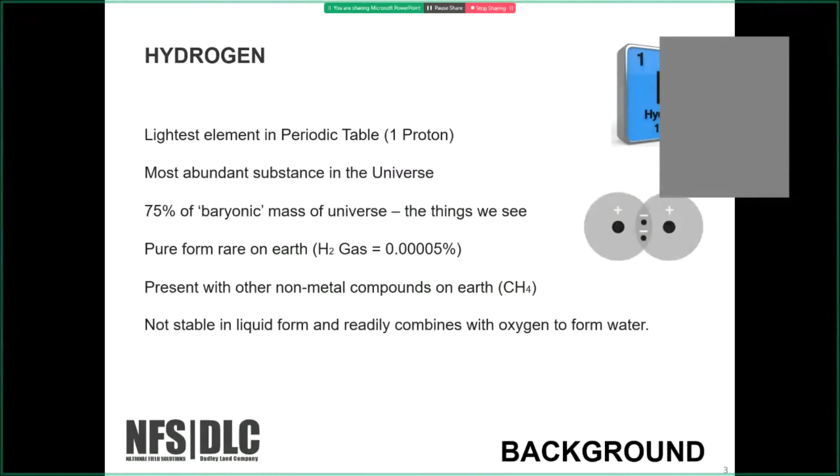All right, so some history of it. A lot of the development of hydrogen we know about is in Europe. I don't know if other parts of the world had much going on, but in Europe, 1520 was the first time there was a record of hydrogen, from Paracelsus - am I pronouncing that right? - a Swiss physician, alchemist. And then it goes on with more advancements in the study of hydrogen, mostly all in Europe there.

Hydrogen was given its name in 1783. Hydro equals water, genes born of water.

Electrolysis of water into hydrogen in 1789 by a Dutch physician, and then the concept of a fuel cell in 1801. One big advancement with hydrogen was the ability to do a Haber-Bosch process, creating fertilizer from hydrogen and nitrogen in the air, done a lot in the U.S. Hydrocracking was developed by a German scientist.

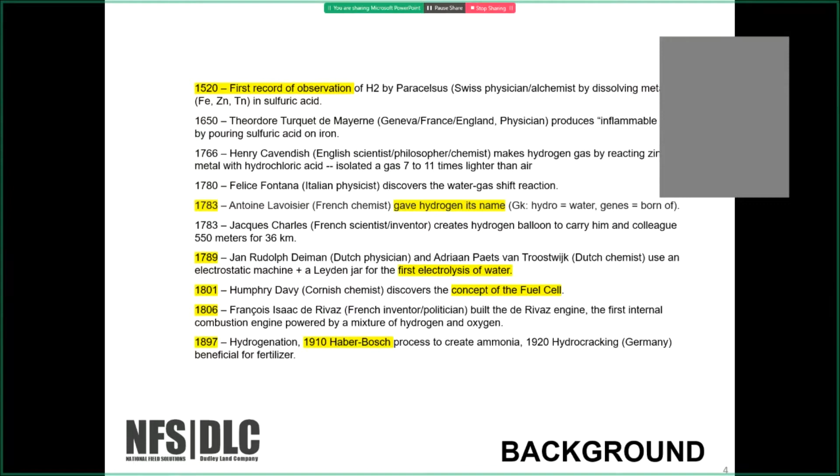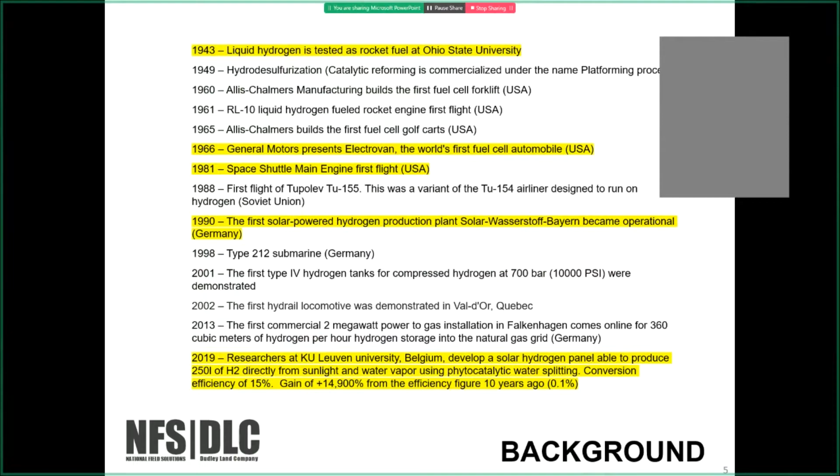Further along in the USA, land of innovation, Ohio State University tested liquid hydrogen as rocket fuel, which went on to be used in space propulsion for spaceships. General Motors got its own Electrovan, the first fuel cell vehicle, in 1966, and it goes on from there. They got into solar-powered hydrogen, a lot of that in Germany in 1990. So a lot of great advancements coming along, and hopefully we get more of those in the USA, and we are.

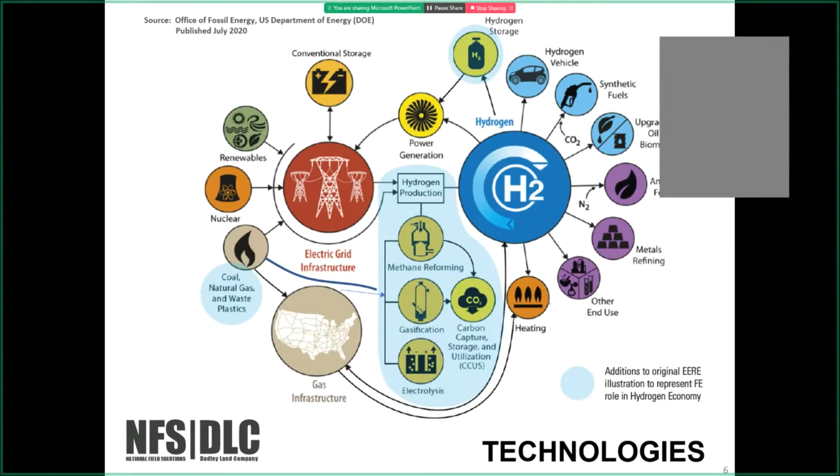There are different types of hydrogen, different colors. People categorize them to describe them, based on the source of hydrogen, the methods used to produce it, and the byproducts of producing it. So there's gray, blue, and green.

Gray describes hydrogen being created from fossil fuels with carbon dioxide byproduct released to the atmosphere. You can also create it from biofuels and release carbon dioxide to the atmosphere, so it's not just petrochemical.

Now blue is hydrogen created from a carbon source, petrochemical or could be biofuel. Most often, 99% of the time in the U.S., it's from petrochemicals right now through the steam reformation process, or SMR. When that CO2 is released, it's gray.

When the CO2 is captured for storage or reuse somewhere else - there's even talk about turning that CO2 into graphene, because graphene is a great material, and they're coming up with new ways of using it - well, then that would be considered blue. You're no longer releasing the CO2 to the atmosphere, you're storing it or reusing it.

And green is hydrogen with no CO2 byproduct. Green hydrogen is created from water using electrolysis generally, although there are other methods for splitting hydrogen away from water. The byproduct would be oxygen, no carbon dioxide produced.

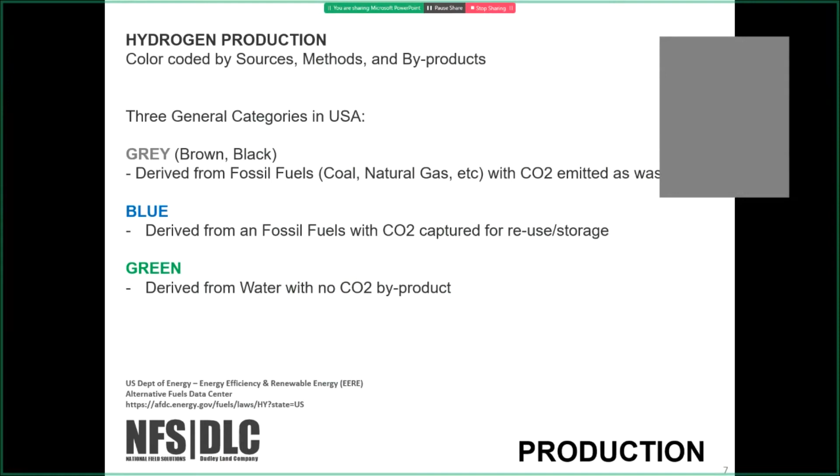Steam methane reforming uses heat plus petrochemicals to extract the hydrogen from the CH4 molecule. Electrolysis, that 1%, I already explained. There are also other ways of extracting hydrogen: photoelectrochemical, like from photovoltaic cells using catalysts, and photobiological, getting algae and bacteria to create hydrogen using sunlight under certain conditions - very much in the early stages of research.

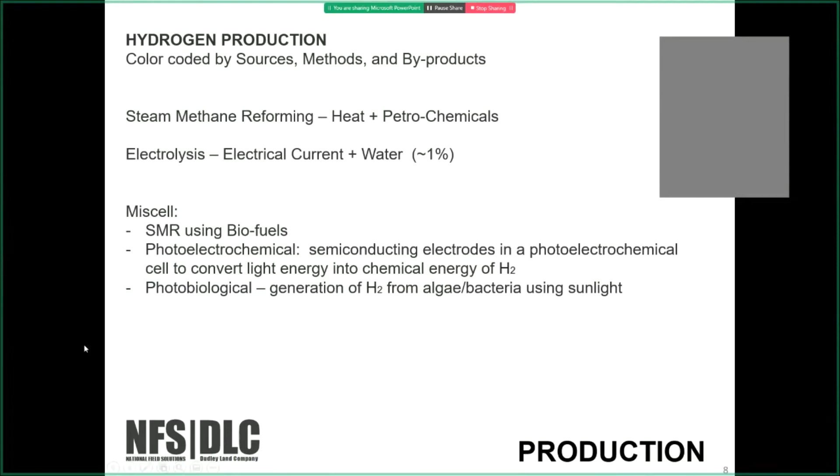Now, there's currently a lot of talk about integrating hydrogen into natural gas lines, and it's already started in some countries. It's set to go up running this fall with the Long Ridge Energy Plant in southeast Ohio, Hannibal, Ohio.

Hydrogen does cause a problem of metal embrittlement, steel embrittlement, but not much at low levels. So you wouldn't run 100% hydrogen through an existing steel pipeline - you'd want something like a plastic, a polymer pipeline. So even if we did go all hydrogen someday, we'd still need plastic feedstocks. Fossil fuels would definitely still be a necessary part of our economy.

When looking at transmitting it through the existing natural gas supply chain, you'd go up to 5% - they're going to start at Long Ridge doing 5% hydrogen and natural gas as a blend. You could go up to about 10%, and then you've got concerns about steel embrittlement. So we're looking at gathering lines, transmission lines, and distribution lines.

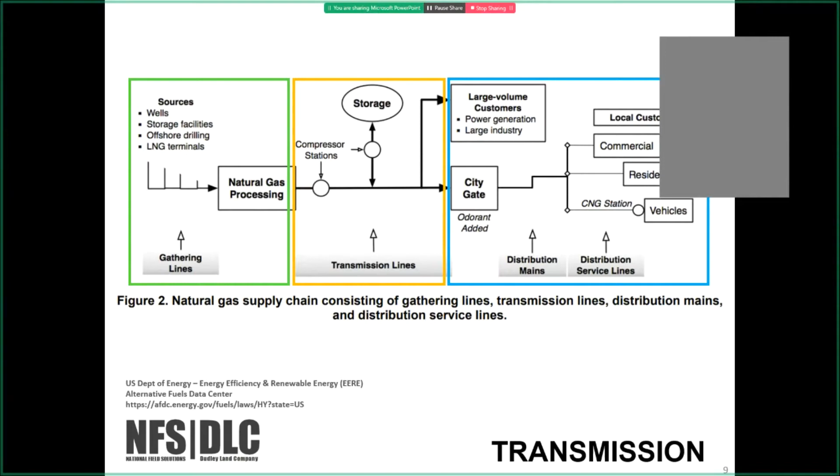Those are the three sets of pipeline networks that all come together to extract natural gas and run it through to an end user. And each of these has its concerns with hydrogen.

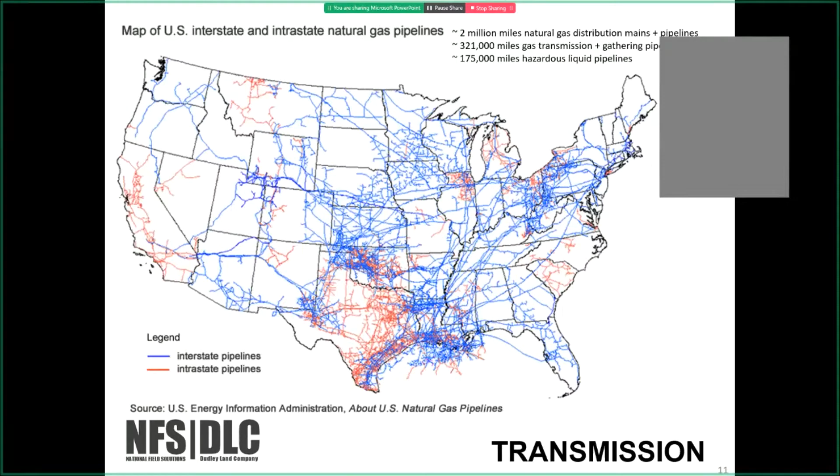Some concerns about using hydrogen in our existing infrastructure: one is steel embrittlement, another is the cost. If you want to go hydrogen, you'll probably have to maintain, upgrade, or change out your pipelines so they're more compatible with hydrogen. Hydrogen is a tiny little molecule, while CH4, your methane, is a larger molecule. Hydrogen's teeny, it can actually leak out through pipelines, not en masse, but just enough. You'll have some transmission loss, more so than with methane.

Even with plastic, you'll have a little transmission loss, just less than with steel. So the steel embrittlement is one problem, replacement and maintenance on pipelines is another, and then new safety regulations. When you're taking a chemical or compound that's more volatile and sending it really close to a populated area, there are some safety concerns.

Plus, if you're getting people in there to work in confined spaces along these pipelines, and you have a very teeny molecule of hydrogen leaking out through seals that have to be upgraded, maybe compressor stations, going into confined workspaces, that can displace oxygen. So a worker who'd enter in there could suffocate. And then you have to worry about creating a spark near an environment with hydrogen and oxygen - that could be bad. Transmission loss.

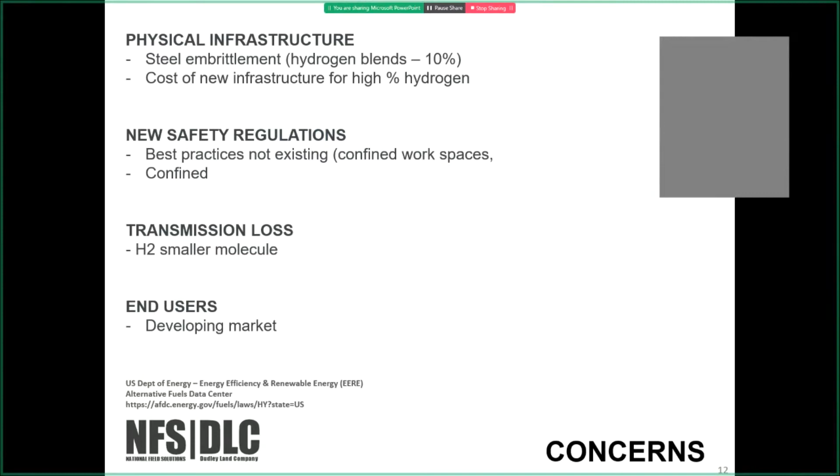So the talk is, well, we're looking at incorporating more hydrogen into our economy, to use a blend right now, and that blend is about 10% hydrogen in the national natural gas grid. If you went 100%, you would have to replace a lot of these gas lines or install new ones.

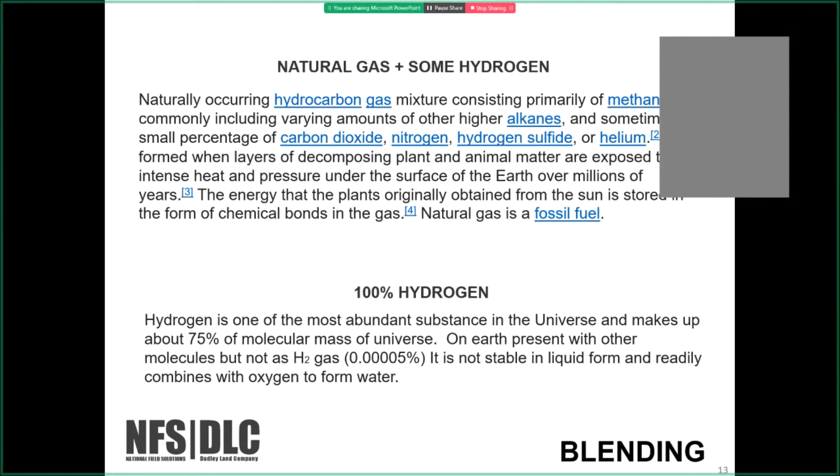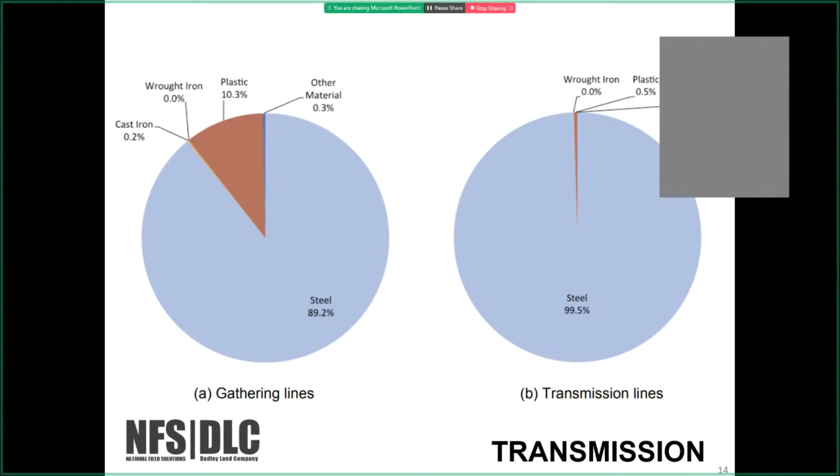So when we're looking at the existing infrastructure out there, a lot of it's steel, and for the gathering and transmission lines, the majority of pipeline components are steel, only a little bit is plastic. You can see about 10% of the gathering lines and hardly any in transmission lines. Your distribution system is separate from your transmission - that's where you're going to go to your end users, like a commercial area or a city, for heating. Those distribution services have a higher component of plastic pipelines in the total system, so right there, they're better able to handle hydrogen.

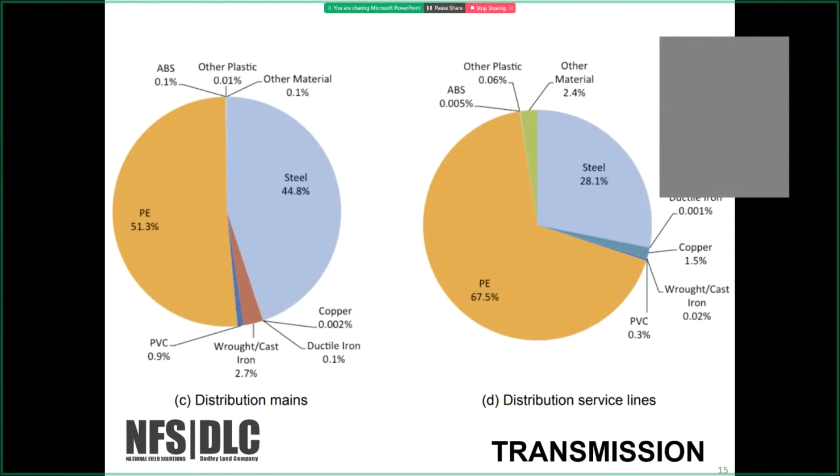But studies are still being done, and the US NREL, National Renewable Energy Laboratory, is funding those. They got a lot of money this last summer, July 2020, to put into collaborative research. So when it comes down to it, about half the pipelines out there are plastic, half about steel. So we can work with that and start introducing hydrogen, and that's the plan.

Some other end users are in manufacturing. Let's just say if we're talking high carbon footprint industries like steel and concrete, they use a lot of energy, and there's talk about fueling them with hydrogen. There are actually some steel and concrete manufacturing plants that are running on 100% hydrogen - they'll just have a higher cost.

Transportation, your larger vehicles, it's more efficient for hydrogen to operate a larger vehicle, like a ship or a passenger train, not so much with your smaller vehicles. The ones that have a greater distance between refueling points and can carry the weight of hydrogen needed to get them there.

Specialized equipment like forklifts, and I don't know if any of you know, but Plug Power is located now in Canonsburg, so a neighbor of ours, and a few others are in that region, and they can build forklifts you can use in an enclosed environment. You don't have to worry so much about emissions and air pollution for workers in small spaces using those forklifts. So they're making some good progress getting those out in the market.

Petrochemical refining, power generation, you got the Long Ridge plant with GE turbines that are meant to run on hydrogen or natural gas. So General Electric is really putting money into that advancement.

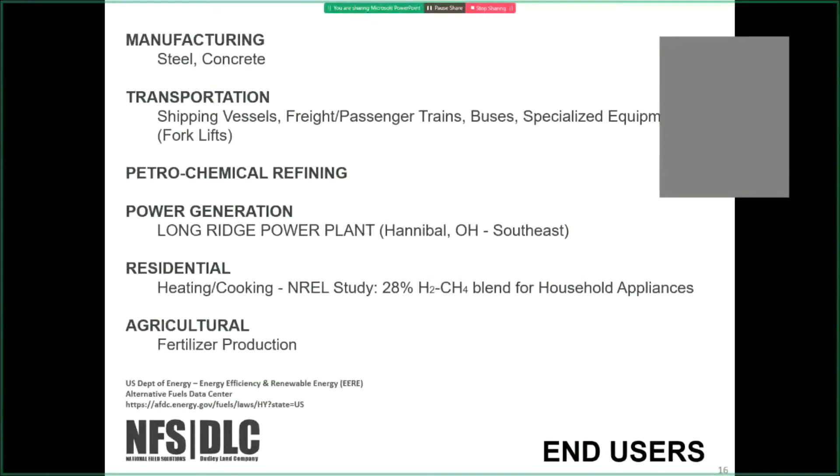And then agriculture, we had a big population boom thanks to fertilizer production. That's the Haber-Bosch process invented by the German scientist. And we've seen examples of that actually in the Midwest, where they've got a local fertilizer plant that produces ammonia from the air, from nitrogen and hydrogen, and the electrolysis splits the water into hydrogen that's combined with nitrogen from the air and produces fertilizer out in the Midwest.

Pretty neat stuff. So our concerns would be leaks, safety, appliance upgrades anyway when you're talking about distribution into these systems and to the end users.

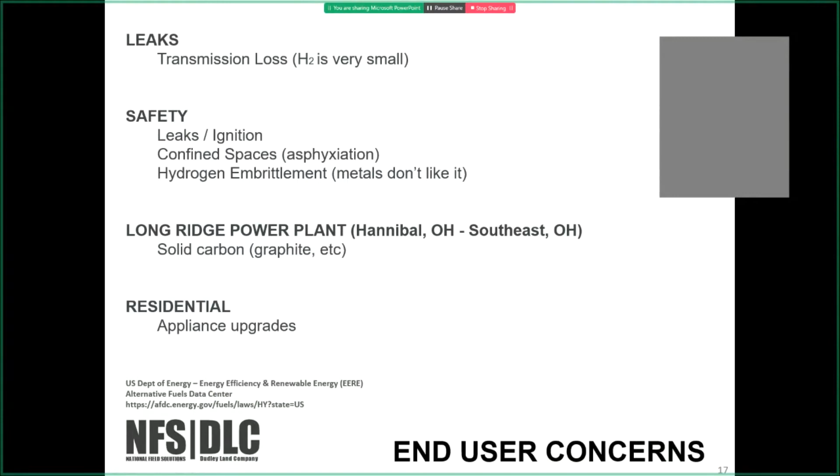We have some incentives coming out related to the production and technologies here in the U.S., a whole pile of them. There's a lot of text. So the government has come out with incentives for low emissions vehicles, tax credits to help people embrace more of these alternative energies and alternative technologies. So there's a whole list of them, and they're on the books right now in the U.S. Code. Fuel tax credits, improved technology loans, and so there's support for it.

There's also policies of developing a national alternative fuels corridor with hydrogen fueling stations along well-used highways, thinking that trucks could benefit from this, the shipping.

And we've probably heard of ESG, the environmental, social, corporate governance. It's basically like, I think of it like morals for corporations. And they're really getting on board with it. That's great. They promote sustainability, social justice. And you've got companies like Shell, BP, Total, Dominion. They're exploring the use of hydrogen and their future plans.

U.S. has its own hydrogen strategy going on right now. So although we only have about 1% of hydrogen produced via electrolysis, 99% from petrochemical, there's a lot of funding that was introduced this last summer under the last administration, $64 million to form collaborative research efforts to develop new technologies, get new efficient electrolyzers, catalysts for splitting the hydrogen. And so they're making a lot of progress.

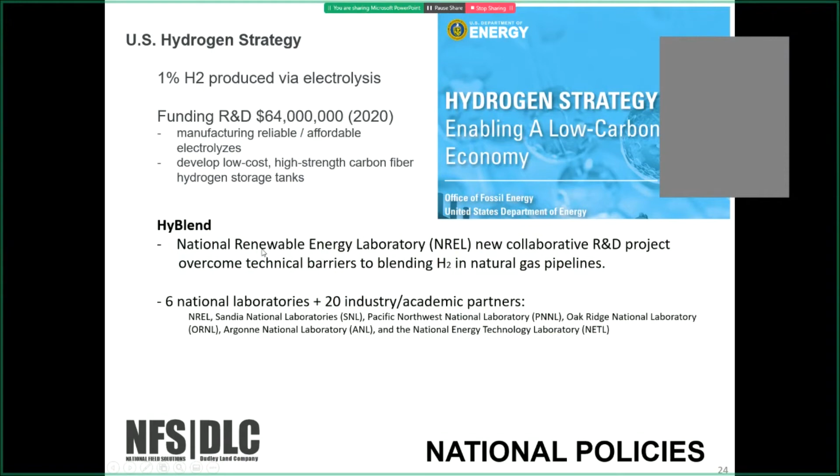And we're hearing also how there are some companies out there, like Southern Gas is pushing big into this HyBlend collaborative team. So other countries around the world are making strides, like Germany, mostly landlocked, doesn't have a whole lot of natural gas reserves itself. They're pushing for a hydrogen strategy, and they're partnering with offshore wind in the North Sea to produce hydrogen, have it pumped in through their natural gas grid.

Scotland also, they have an excess of wind power, and they're researching ways of getting hydrogen created more efficiently.

Australia, which was heavily coal dependent and shipped a lot of that to Asia, now that they're seeing like Japan wanting to go green and completely fossil fuel or coal free, they're pushing to use their resources. A lot of bare land that's non-used, they're going to put that into solar. They already have, and they've got their own national hydrogen strategy to ship that liquid hydrogen off to Japan and other Asian countries. So they're really jumping on it, and they put a lot of money into it. They see a lot of potential from it, so there are a lot of companies investing in them, like in Europe. China is also pushing for hydrogen itself.

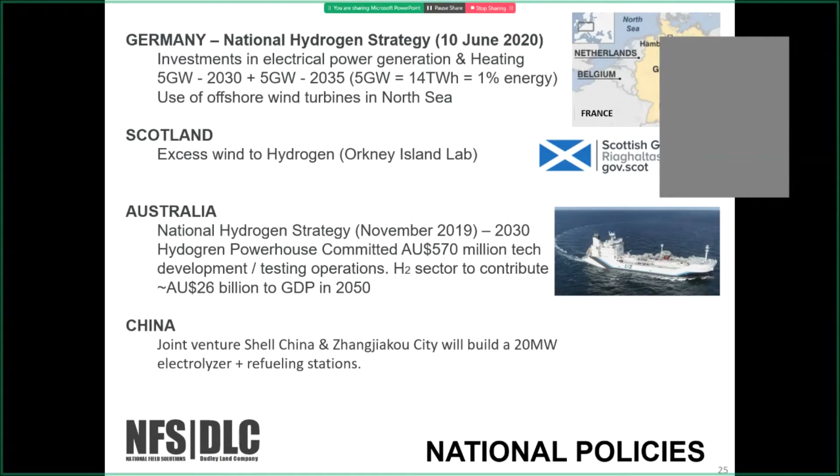So some regional businesses we have right in our own backyard. Plug Power is one. It's a company based up in Albany, New York. They purchased the local company in Canonsburg, and they're growing their operations out there, researching ways of promoting more technologies like their existing forklifts, and other advancements. So I think our region can stand to benefit from it.

And then the Long Ridge Power Plant in Southeast Ohio as well, with their plans to start pumping by this fall. About 5% of the total volume would be hydrogen in the natural gas lines. And they're open to having, it's an area with a lot of potential to have solar and wind contribute some of that green energy into it. It's still a small amount. We're going to be definitely heavily reliant on fossil fuels to energize our country, for sure.

In production, some of the trends I'm seeing - you can pull apart those little hydrogen atoms a lot better if you have a good catalyst, and that helps push the chemical reaction along. So we're making strides into developing new catalysts and technologies to separate hydrogen using electrolysis more efficiently. And we can use all that great fossil fuel to make the pipelines it's going to take to redo our whole network if that's the direction we go in, because that's going to be a lot of plastic.

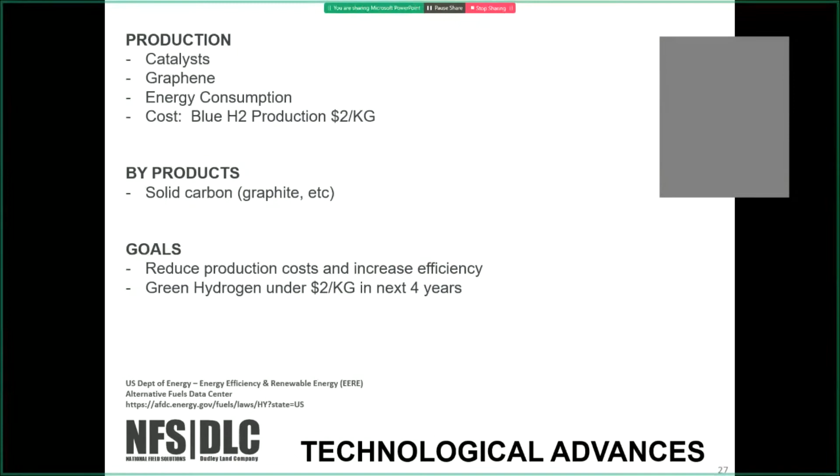So those are being researched right now. And the goal is to get the cost of hydrogen down under $2 per kilogram in the next 4 years, which they feel is realistic because it's already come down a lot. Like solar - many advancements have been made in solar. They've gotten the cost per watt down very affordably. They're expecting that with hydrogen.

And that's why I wanted to talk to you today about this topic, just so you're aware of this trend, and that major energy companies across the world, and definitely here in the US, are looking at embracing hydrogen. Keep in mind that the current hydrogen-only pipelines are basically near refineries. A lot of those are down your Texas Gulf Coast. That's only 1,600 miles total, and we've got 2 million miles of other pipelines. That's a lot of potential work for us to get into.